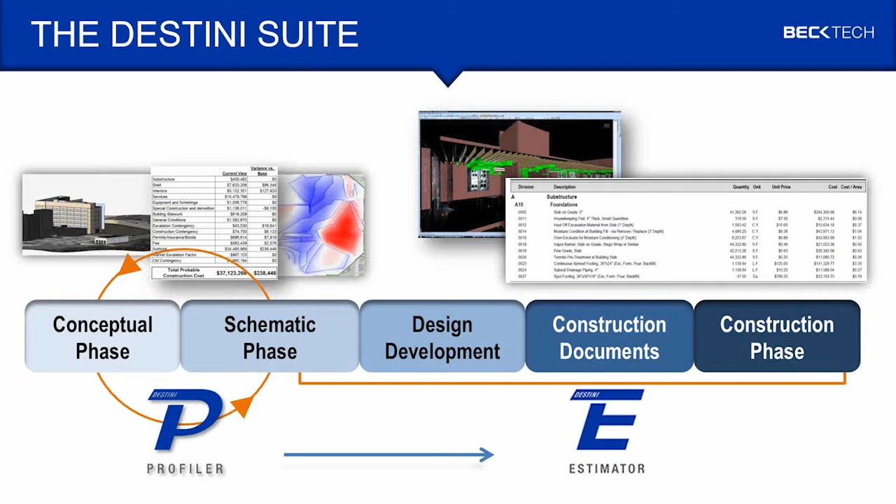The basis of why they approached us to develop a new solution was that they felt that the world was changing. Owner expectations over the years have dramatically changed. In most cases, we're no longer in a hard bid world, we're more of a negotiated world. In the negotiated world, owners are looking to the GC to help them set that budget and then manage the design team and the construction process to make sure that we stay within that budget.

So even if there isn't a GMP at the front end, that first number that you put in front of the owner is really important because it's something that you're going to get to live with for the remainder of the project. They're also seeing a lot more collaboration between the members of the design and construction team throughout the life of the project.

So it's no longer just about putting together a cost. It's really about how you can work with the design team during the pre-construction and construction phases of a project to make sure that the design quality is maintained and not compromised by budget challenges, but the project stays on budget. Although the world in which most of you in pre-construction live is still a 2D world, Sundt's comment to us was that the world again is changing.

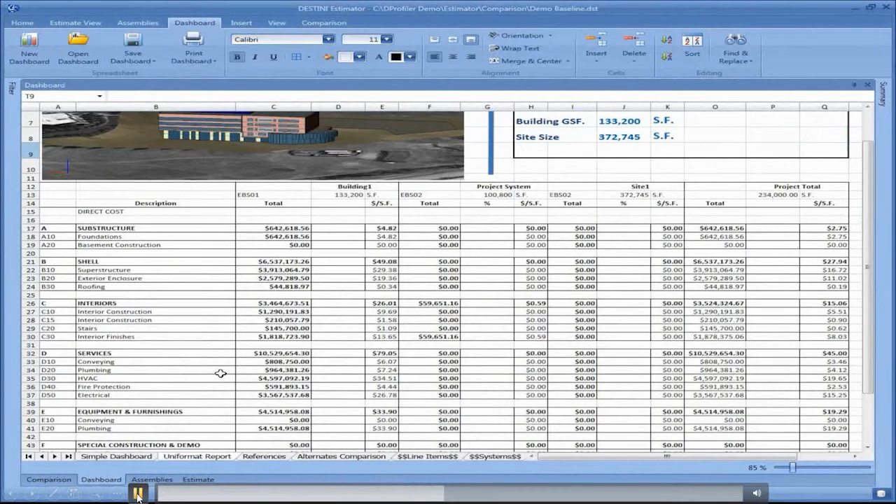Inside the estimate window, you can load whatever Excel files you have. The last piece that I'll cover is the ability to load multiple estimates and run comparisons.

Back to Sundt's point, the world is changing. The owner wants more insight. The design team wants more insight into what has changed between design iterations as it relates to the estimate. Inside Estimator, you can load as many estimates as you want, and then you can compare estimates side by side. There are abilities to load past projects, so you can compare where this project is relative to, say, a past office project or data center.

You can escalate the entire estimate for time or for location. In this particular example, we've actually loaded a baseline estimate with 2 VE options. There are then features and functions inside Estimator that enable you to review what has happened across these 3 estimates. You can compare the data that the estimator has been tracking, so the skin increase between option 1 and option 2, or between SD and DD, and you can use this as a communication tool to the design team.

You can also start to side-by-side compare the costs across these three estimates. You can do the same with your indirects. You can also start to drill down and look at the costs, say, by 16 division CSI, and compare what's the difference in division 3 or division 8, so that you can communicate what has happened.

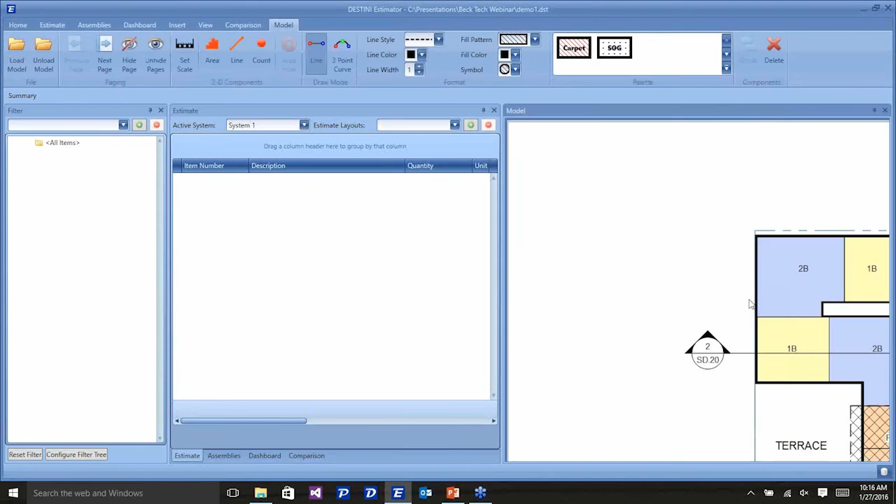The first thing I'll have on the PDF—this is a typical floor plan—and I'm going to fly at a fairly high level, not going into all the details. This particular version is hot off the presses; our R&D group would probably say it's still on the presses, so some of what I'm showing you is incomplete, but most of it is being finished up as I speak. So the basic idea is I have an image.

I'd actually scaled this ahead of time, but you can define two points to define the scale on the image. Then you have the ability to do takeoffs directly in the tool—for example, you can define things like the line color and the fill color. Let's select one of these and take off an area.

So I'm going to sketch an area down here, and come down and sketch. I could zoom in, but since we're doing a quick demo, I'll keep it at this resolution. So you can sketch an area.

We also have the ability to define what we call takeoff items—pre-configured patterns, colors, and properties that you as the user define. I'm going to click on one I've set up ahead of time called carpet, and take off another area, coming up to one of these rooms. You can tell I'm doing a demo—I'm not being particularly exact.

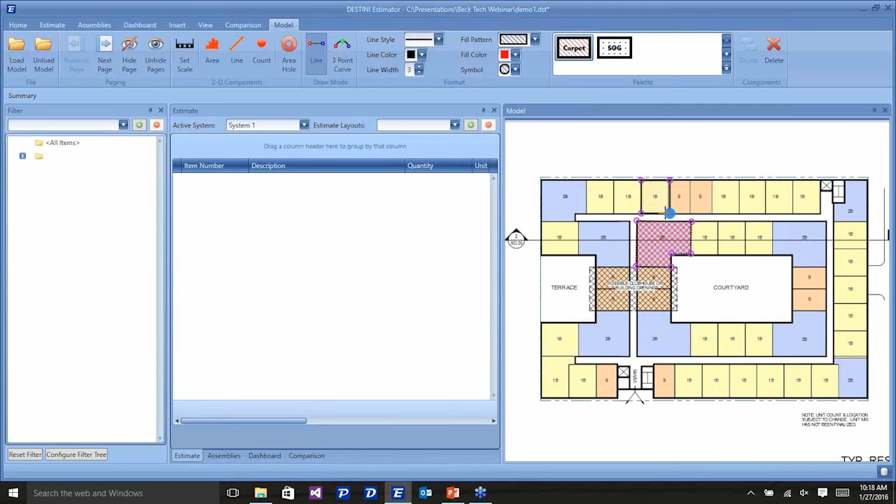The last thing I'm going to do is draw a line takeoff, maybe to represent some partitions. We give the user hotspots, so you can click on the corners of whatever you drew before, and it will automatically snap to 90 degrees. So right now I've got two areas and a line.

Every one of these objects has properties associated with it. At the bottom, for the line I've got selected, it gives me the properties associated with that line—one property is the height. This is analogous to telling it to compute the surface area of a wall represented by that line, say 8 feet tall, so we can use that quantity when entering costs.

We can also do the same thing with the areas. So for any of these areas, we can actually look at both the properties, the drawing information, and then later any costs that we've actually tied to that quantity.

All right, so we've introduced two areas and a line. What I'm going to do is pick on one of these, and I'm going to start to map that takeoff quantity to an item in my estimate. So I'm going to come over to the estimate window, and I'm going to go into the database that I'm currently connected to. And I'm going to find a line item representative of a partition, and I'm going to use one of these 1-hour partitions.

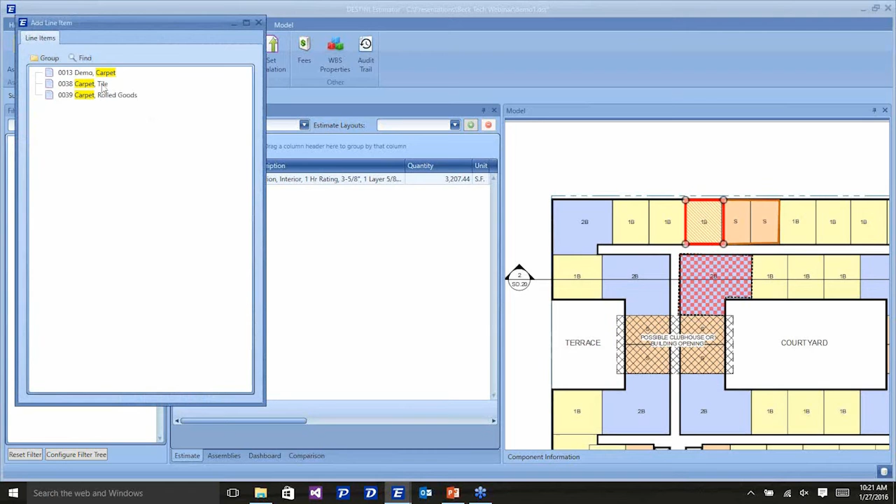So I'm going to come in and I'm going to find in the database a line item for carpet. The database that I'm currently connected to comes free with the product. It's about an 1100 line item database. Each item in the database, and I'll show you this in just a little bit, has multiple classification schemes mapped to it.

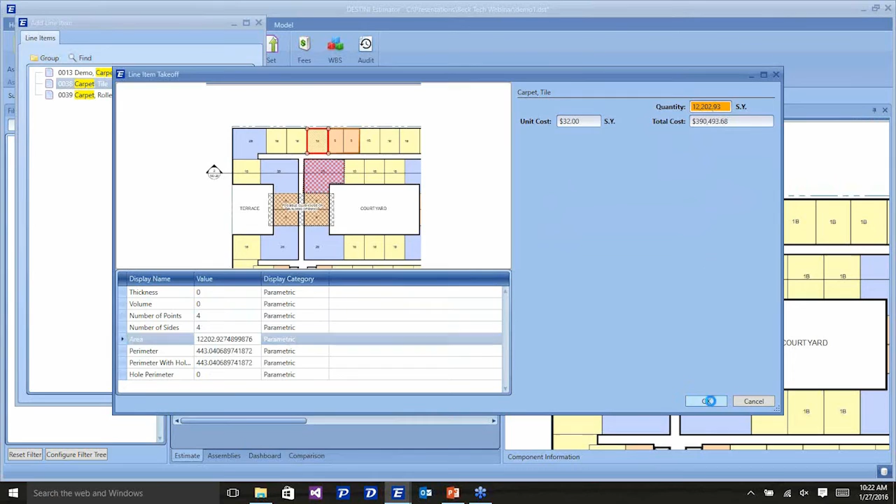On this particular case, I'm going to grab the area of that carpet, and again, I'm going to drag it up. So what I've actually done now is I have two line items in the estimate associated with two different takeoff items. I'm going to quickly come over to the filter tree, and I'm going to set up a filter tree in this particular case based on the Uniformat classification scheme.

You'll notice when I click on this empty folder, both the line and the area that have been mapped to costs will actually disappear. So there's a very quick way of showing you which items in the takeoff window currently have no costs associated with them. Conversely, if I click on interiors in the estimate, it will show you the items that are currently in the estimate that are mapped to Division C interiors.

If I expand this, you'll notice that my carpet is in my interior finishes versus my wall, which is in my interior construction. So if I go backwards and forwards, you'll notice in this window it will filter the estimate, and in this window it will also filter the takeoff. So if I go backwards and forwards, you can kind of see that.

Now, it will always leave in here any item that currently doesn't have costs, so that I can actually at any point go in and pick an item and come up and add it. If it wasn't here, you wouldn't be able to pick it, and it may be a confusing way of being able to actually get to that takeoff item.

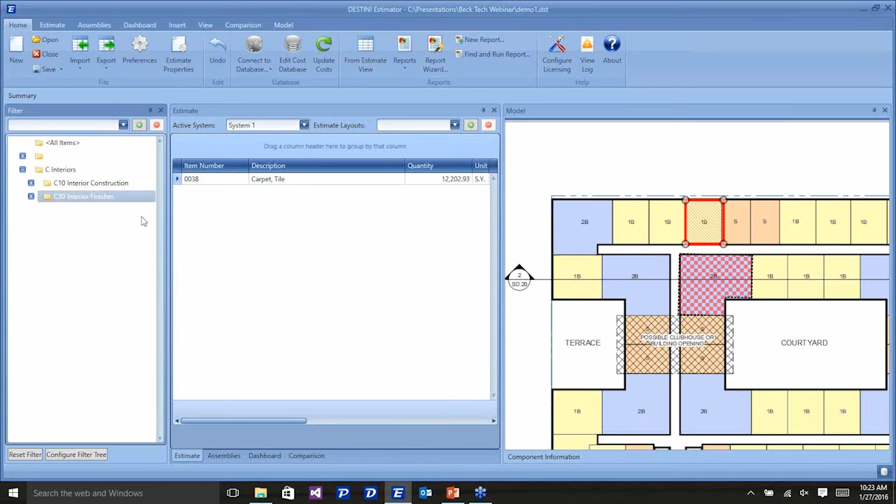All right, I'm going to quickly move to models. So the basic idea of defining a takeoff object, an area, a line, a count, associating properties, area, volume, perimeter, number of points, height, and the ability to map those to costs holds whether I'm doing a 2D takeoff or a model-based takeoff. So in the model window, I'm going to come over and load a Navisworks file.

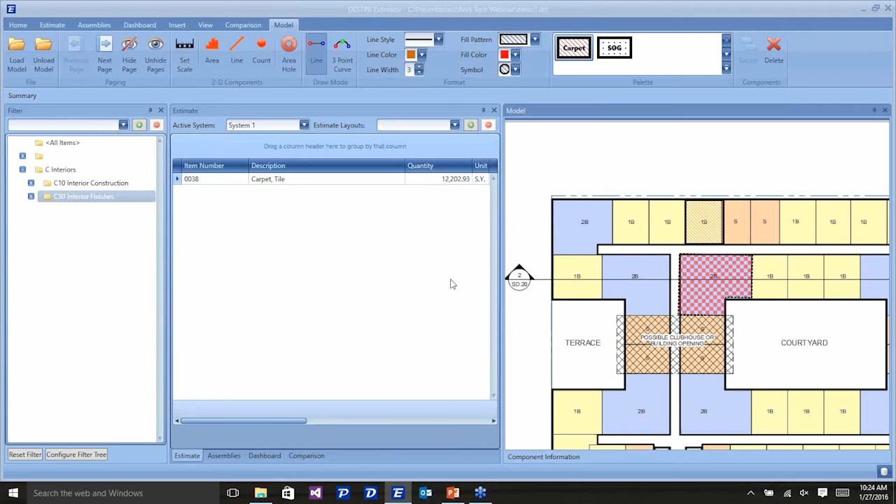It will load this model, and once it's loaded, we'll be able to zoom out. All of the mouse controls that anybody who's used Navisworks is used to using, like zoom in and zoom out, are still in play.

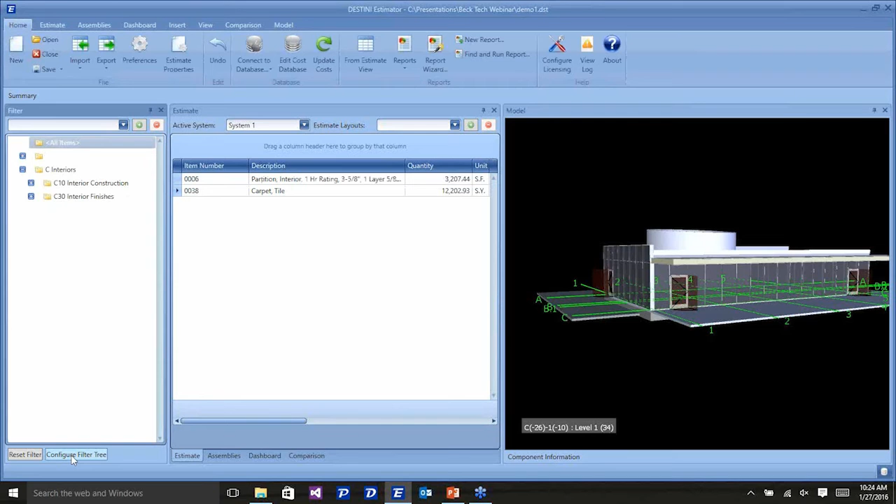On the left-hand side, I can also now use the filter tree for not just picking properties in the estimate, but for picking properties of objects in the takeoff window. So if I had associated a user-defined property with my 2D takeoff items, I can use that in the filter tree as a way of arranging my carpet versus my VCT versus my other flooring materials.

The same is true in the model. So in the model, I have properties like the layer, and properties like the type. I'm going to use those temporarily for reorganizing the tree.

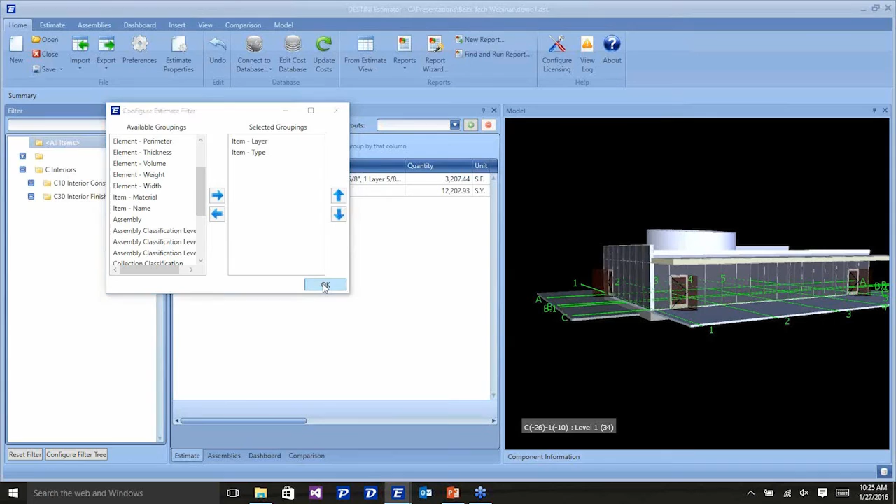As soon as I click on level 1, you'll notice that some of the geometry in the model disappeared. If I click on level 2, you'll see some of the other geometry disappear and the roof geometry reappear.

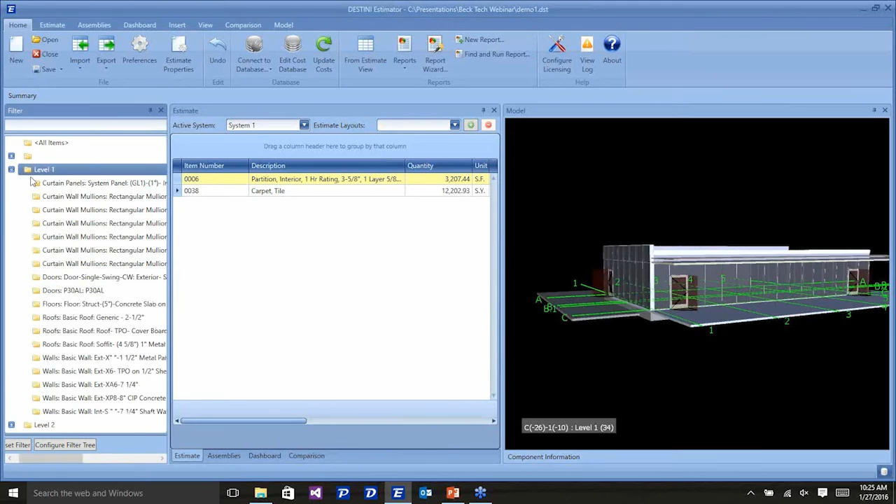If I start to expand and click on things like the curtain wall, I can very quickly come back over to the takeoff window and pick items within the window that I want.

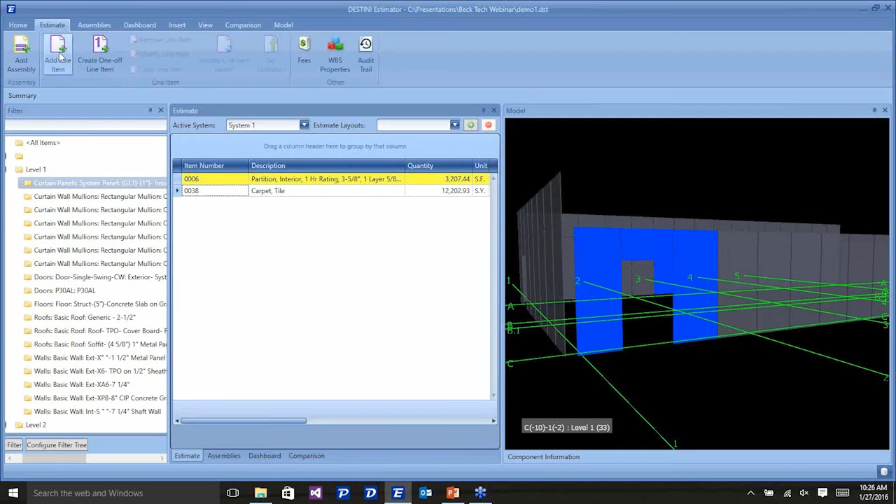Let's just use 3 of these as an example. Just like we did before, I can come in and add a line item. So if I come down here and type in curtain wall and type in standard, the same dialog that we got in 2D will also appear in 3D.

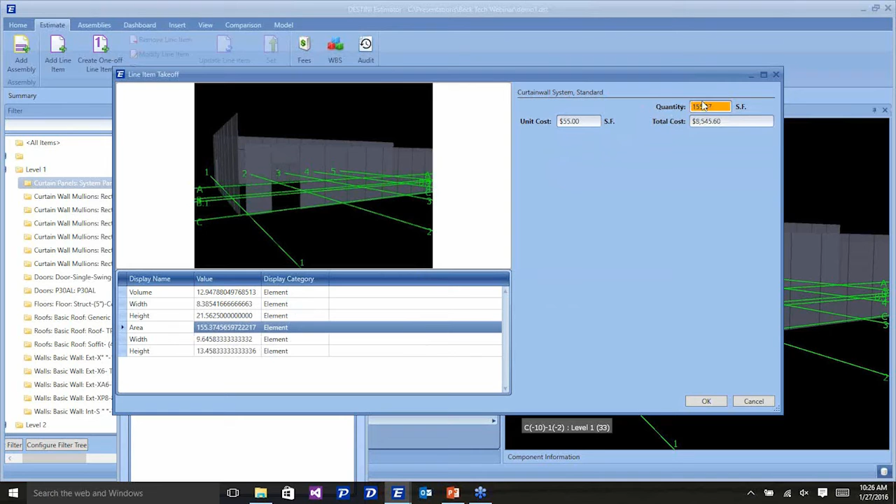Again, I can use the areas of the items that I picked as a way of quantifying the line item that I want mapped to those items of cost.

I can also use it as a way of picking other objects. In this case, I'm going to pick everything. There are some shortcut keys, just like you have in other tools. Control A will pick everything in the window. This time, instead of adding a line item, I'm actually going to take off an assembly.

So I'm going to come in here and look through my database of assemblies, and I'm going to take off a slab on grade. In the slab on grade takeoff, the same idea holds. We have an image representing the items I picked, along with those items' properties.

Just like I mentioned for 2D takeoff and line item takeoff, any of these values you can type. When I make a change at the top, it will show me changes to the line items at the bottom. I can grab things like the area of the slab to answer this particular question, and then it will give me an indicator showing that I'm actually using that parametric variable.

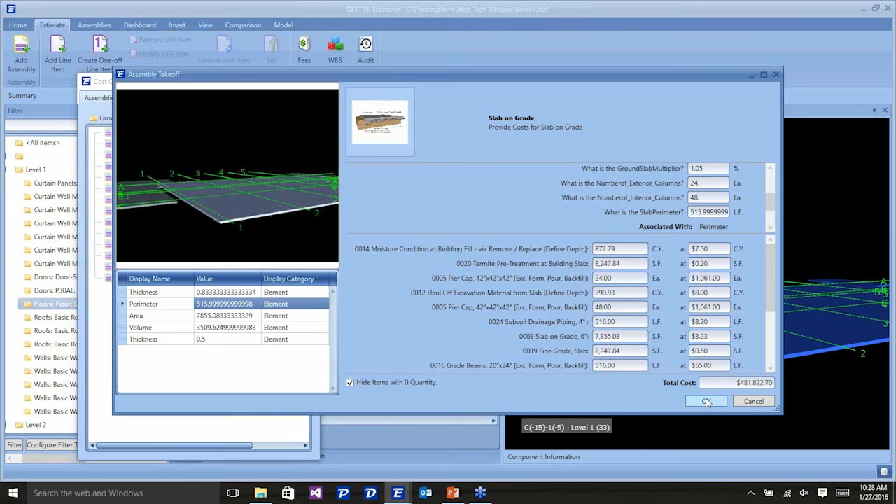I can scroll down through this list of questions. So I can come in here and say, alright, I manually counted 24 exterior columns and 48 interior columns. And then maybe I drag the perimeter in order to take off the perimeter based on the area of what's been drawn. And then I can say OK.

What we'll actually see as we do this is items being introduced into the estimate. You'll notice those 2 items that were mapped to 2D objects that don't actually know what level they're on or what item type they are show up as yellow. But if I go up to the panel, we see the curtain wall line item versus the assembly for the slab.

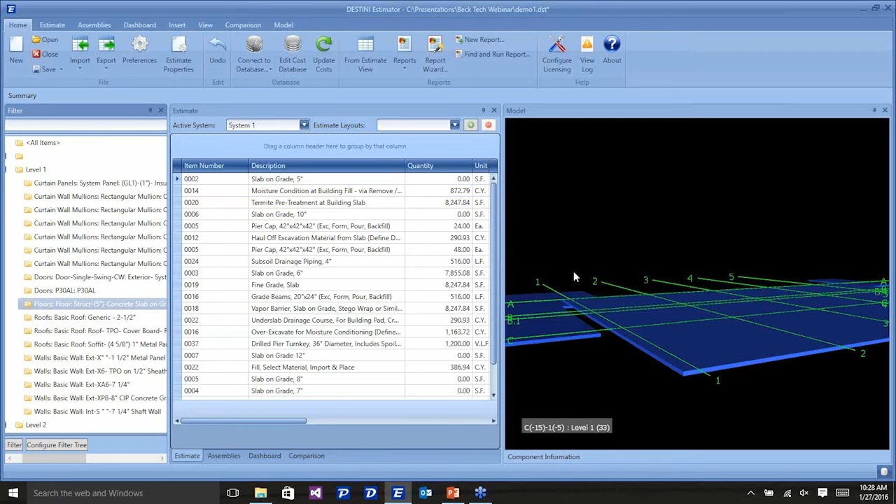If the model is constructed incorrectly, one of the things we've seen before: if I come up to doors as an example, and these are light in color, I apologize, but let's just say I bring these up. I can bring up the properties of one of these objects, and you can actually change the property. So if it was modeled with a generic wall or a generic door, and you need a specific type of door, you can change the value directly.

As soon as I hit enter on the left-hand side, you're actually going to see that item appear. So up in the top of the tree, if I click on it, you now see that door. If I go back down to the other doors and click Control A, you'll notice that door is no longer in that category. So you can also create your own properties and use those in the filter tree.

So instead of just taking what the architect has and trying to figure out how to take advantage of these generic doors, walls, or roofs, you can actually go in and recategorize the data based on how you want to use it. You can also use combinations of 2D and 3D, and the way you interact in 2D is the same as the way you interact in 3D.

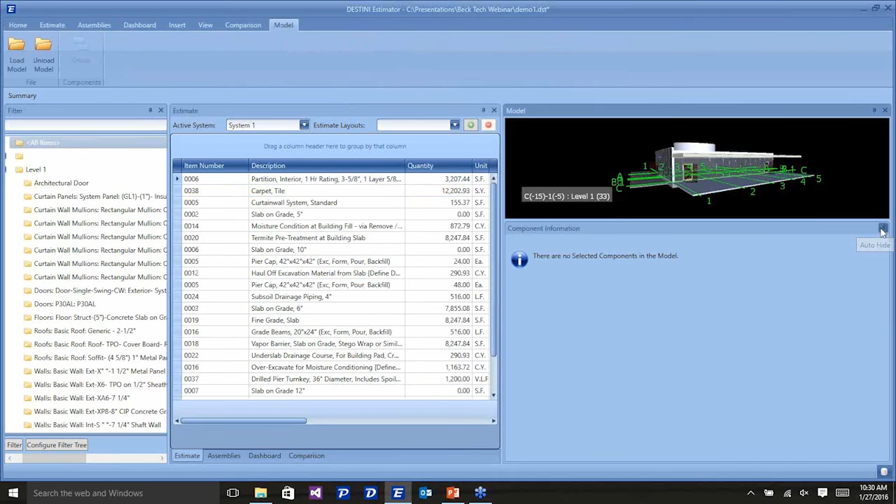All right, let's go to the next piece, the last piece. Okay, now you've got a model, you've mapped some of the costs to that model, but the architect gives you a new iteration of the design. So the way we handle that is you come back in and load the new NWD file.

What it will do is put the application into what we call review mode. So if you click on Update Estimate, before it applies those changes to your estimate, it will show you what has been added, what has been removed, what has been modified, along with the impact of that modification.

If you don't trust what the architect has given you, you can tell it to remove model associations, which will leave your estimate exactly the way it was at the last iteration, but enables you to go back in and remap and recondition that model, instead of just updating based on whatever changes the architect made. You can also tell it to automatically create a new estimate so those changes don't impact the estimate you were working on before.

So for this example, I'm going to click on Update Estimate, and it will bring up a review window. In that window, it's going to show you currently things that have been modified.

In this particular case, some of the curtain wall that we selected was changed. So if you had a list of line items, it would color code these just like our variances or comparisons in the video I showed at the beginning. Dark red would be big negative variances, dark green would be big positive variances, and shades in between would be either positive or negative, but of a lesser extent.

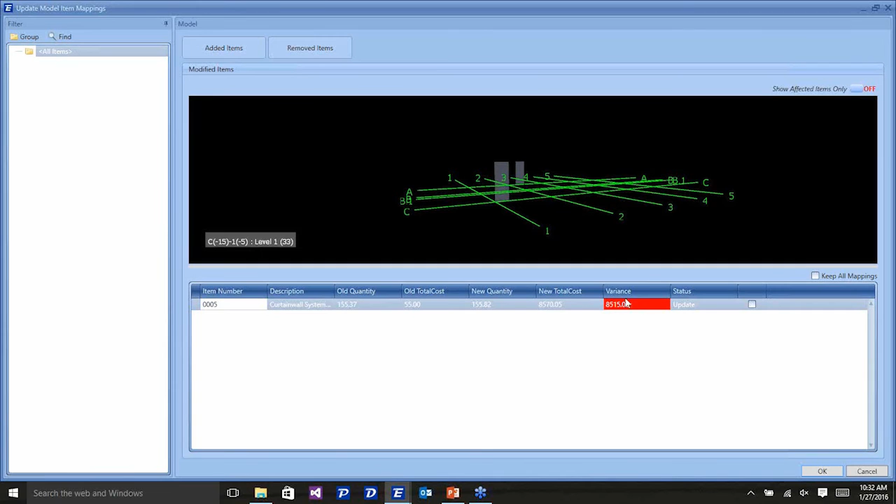At the top, we can look at what was removed from the estimate. In this case, it looks like some of the slabs were removed, and it will show me the quantities being removed if I apply those removals. Lastly, in this case there was nothing added to the model, but if there were objects added, it would show me those objects introduced in this design iteration.

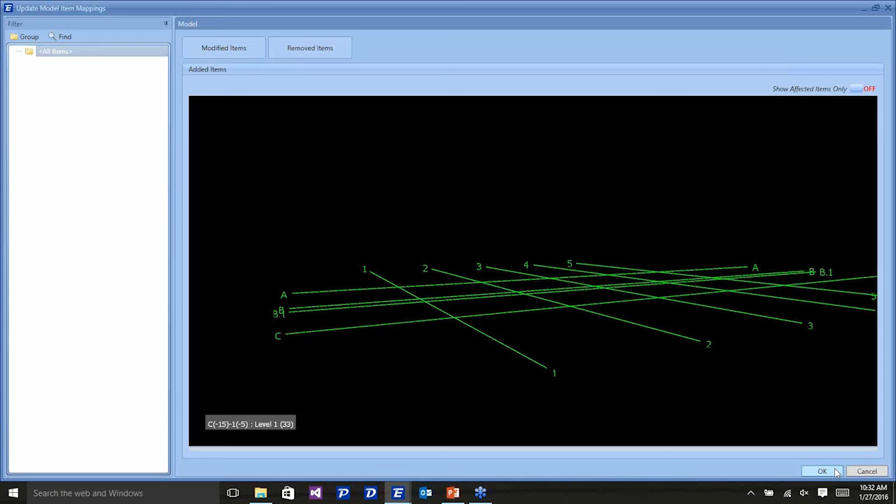If I click Cancel, it'll leave my estimate mapped to my old model and old takeoffs. If I click OK, it will apply whatever changes I told it to apply in that modified and added list. So I'm going to click OK. And then it'll ask me to save the estimate.

All right, that is the basic 50,000-foot view of what's coming. So the integration of 2D takeoff, 3D takeoff, the ability to drag and drop takeoff items over items of cost for quantifying your estimate. You can click on items in the estimate and it will visually show you what's tied to them. You can visually pick items in the takeoff and it will show you what costs are mapped to them. And as things change, there's this review mode that enables you to see the impact of the change before you apply it to the estimate.

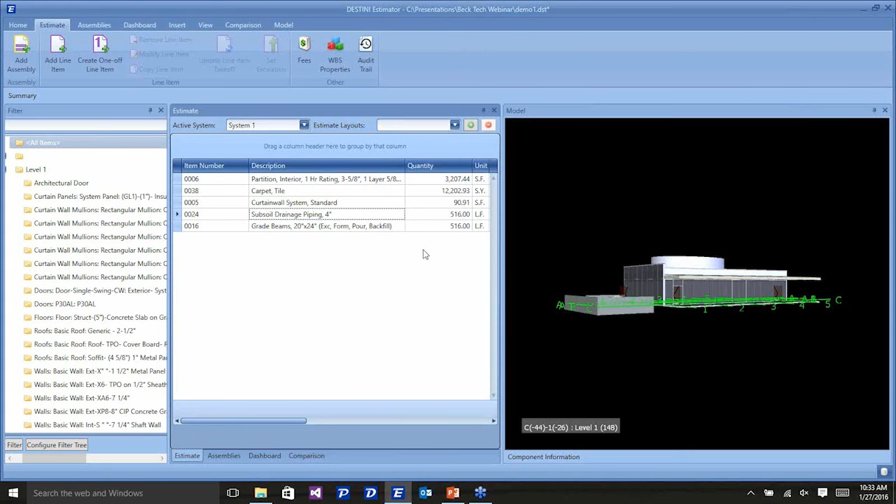All right, so our schedule for this is that we just released a full-blown release at the beginning of this month that included full assemblies and unit price buildup. So if you do self-perform work, you can define your rates based on crews and resources within the crew, and then apply that crew to a particular line item and define a production rate. We also now support rate tables, so you can regionalize those crews simply by moving them from one location to another.